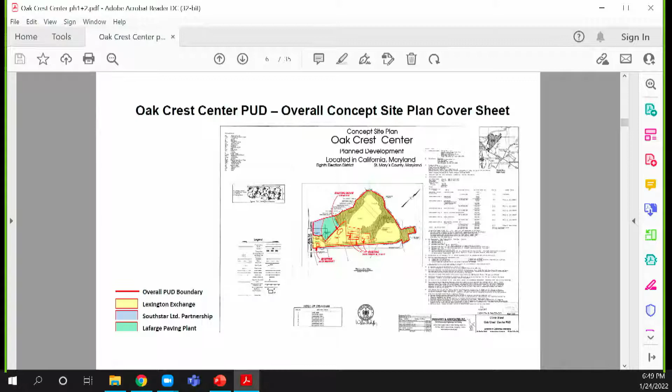This plan is a page from the overall concept plan for the PUD for Oak Crest Center. The yellow area is the actual Oak Crest or Lexington Exchange site. The shaded blue area is the Southstar property. The green shading is the Lafarge plant. Next slide, please.

Okay, this is a slide showing our overall development in the colors. The yellow portion are the 3 buildings that are either constructed or are almost constructed. The R/C movie theater is shown, the Lafarge paving plant and Southstar. And then on the other side of 235 is the Wildwood Center. And then to the south is the Aldi. Next page, please.

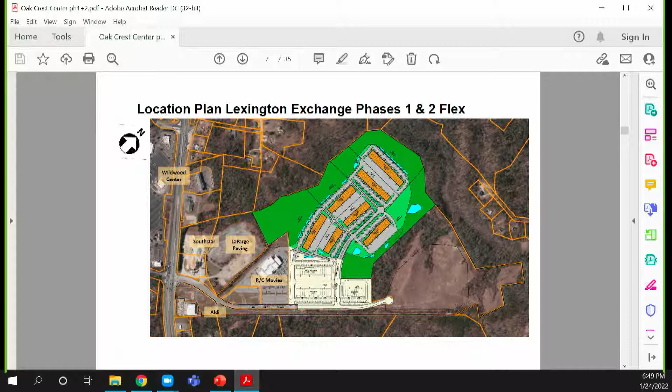This slide shows the area bounded in yellow that's going to be disturbed for this section of plans. It shows the lot lines for the 7 lots that are in there, and also shows in yellow buildings A, B, and C that have been mentioned previously. Next slide.

Okay. This is the good plan that actually shows the development that we're in for tonight. The 7 buildings shaded in brown, and the paving area shaded in gray. This is basically an extension of the same 3 buildings that have been built already into the site. It's the same building type. It has loading areas in between, and the car parking areas out in front.

Let's see. There's sidewalks out in front of all the buildings that'll be extended out to the existing sidewalks from the buildings that are built, that are connected to the sidewalks at Oakcrest Road that lead out to 3 Notch Road.

This site, I'm going to cover a couple extra things on this site plan because it's so easy to see everything, and some of the detailed engineering plans maybe we'll go through a little quicker and stop if there's questions on it. The detailed plans are broken up in a couple different sheets because it's such a big site, but it's just easier to see everything, I think, on this page right here.

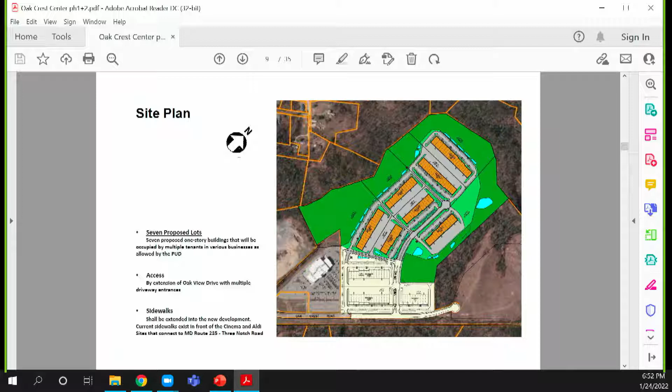And if you look at the site, there's 3 pairs of 2 buildings each with the truck loading in between it and the car parking out front. If there's any questions about the layout, this will be a good slide to ask the questions about. Do you have any questions? Okay. Next slide, please.

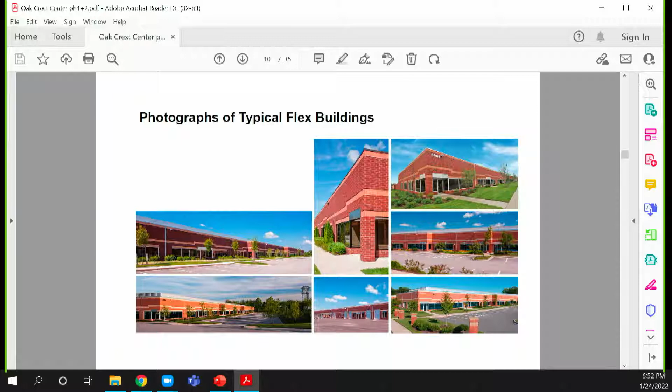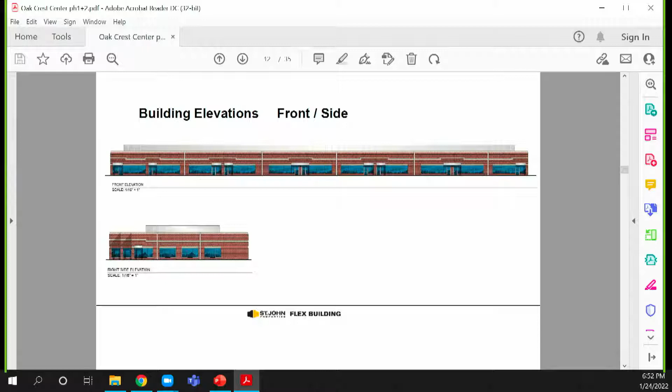Next slide, please. These are the architectural elevations of the same buildings showing the front and side views. And next one, please. Same architectural elevations, but showing the back side of the building and the side. And if you look at it, you can see there's some parts of the back of the building that are set up for truck dock height access, and other parts where you can drive straight into it, just kind of leading to the flexibility that's built into these buildings.

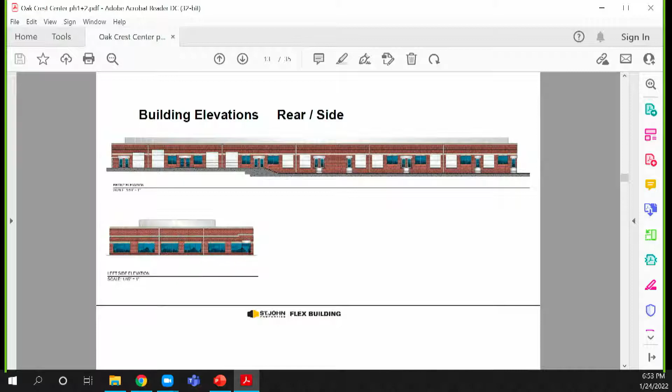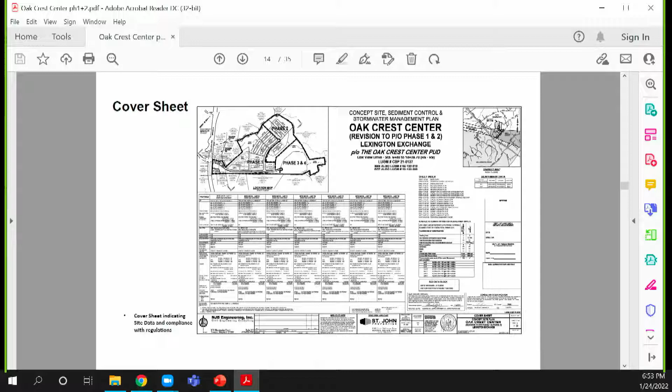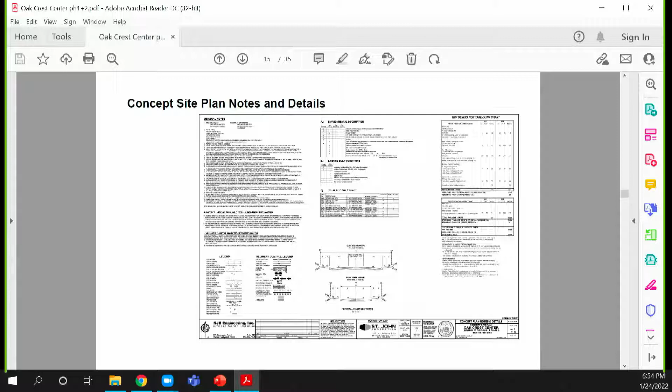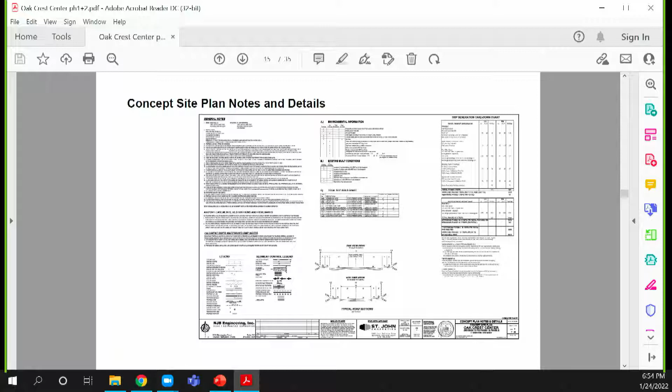Next sheet, please. This is the note plan with notes and details on it. The main point of interest on this sheet is the trip generation takedown chart, which is used to indicate where we are with respect to the required road improvements per the adequate facilities agreement. If you go through the numbers, the first 4 buildings can be built with the Phase 1 improvements already constructed, and the other 3 buildings would have to wait for the Phase 2 road improvements to be constructed. There's a slide at the end that shows the summary of those road improvements, and if there's any questions, it might be good to get that slide up at the end.

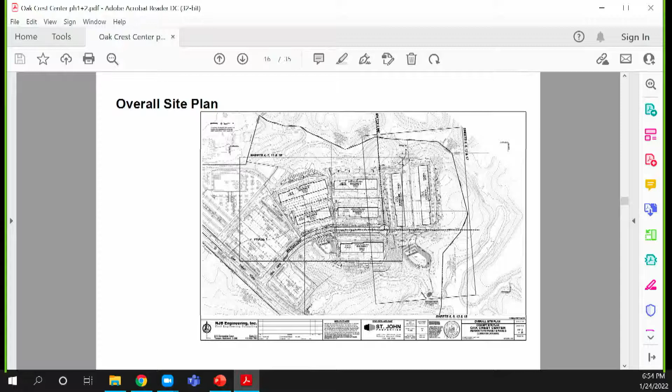The rectangles around it just show that there's different sheets that cover the different areas, just because of the size of it. We're probably going to zip through a lot of this since most of it is on that colored site plan sheet. So let's go through the slides quickly, and if there's any questions, we'll pause to stop at that. That's existing conditions, 1 part of 3.

Continue, please. More existing conditions, just showing the land as it exists today. Another part of the site, same thing.

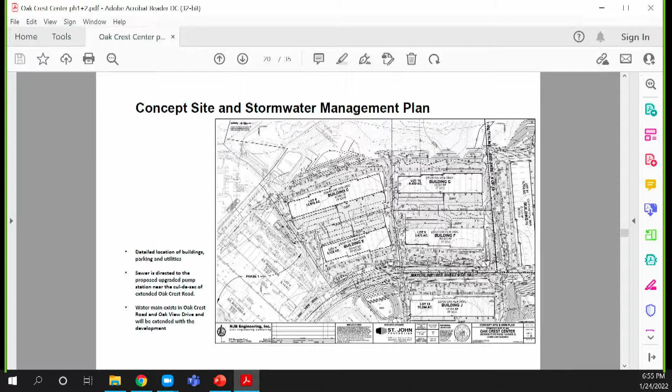The concept site stormwater management plan, just a detailed engineered version of the colored drawing showing the grading and utilities. Another part of the site.

And that's just the 1 building that's by itself without a shared truck loading, just because of the dimensions of the site. Next, please.

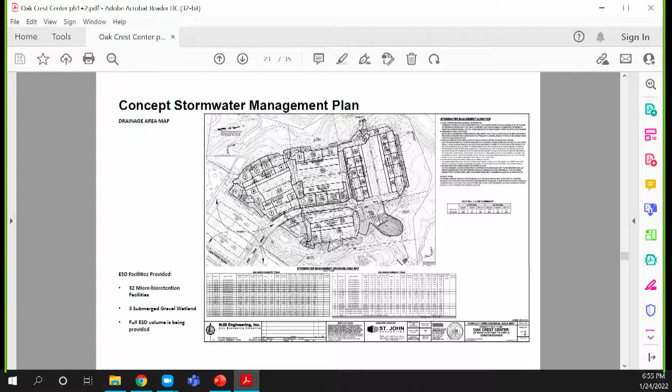That's the stormwater management drainage area map that shows the 30-some micro-bioretentions and the 3 gravel wetlands that were colored in blue on the colored sheet. Next, please.

That's the concept sediment control plan, the first sheet of it, showing perimeter controls to filter the sediment during grading operations. We'll of course need a detailed sediment control plan approved by the Soil Conservation District when we prepare our final plans.

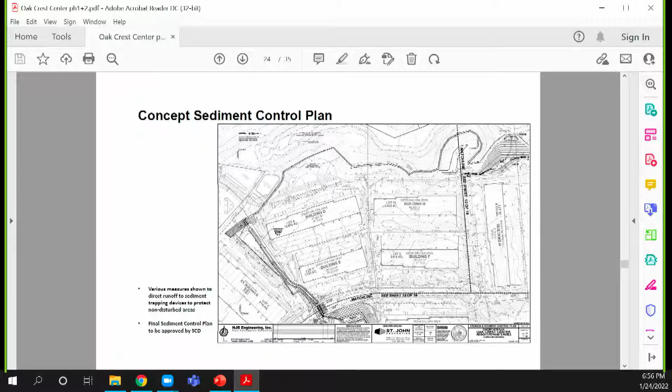A continuation of that as well in the next sheet. Continuation as well.

This is a plan showing cross-sections that, per the regulations and the checklist, we have to take through the site to show the buildings in relation to the topography.

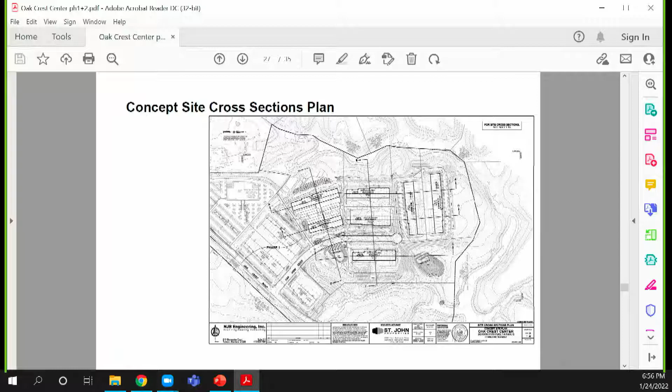The next sheet shows the actual sections themselves, which show how we had to grade the site and level it out a bit to accommodate the buildings. The buildings are 1-story buildings, so they're not big, huge rectangles there.

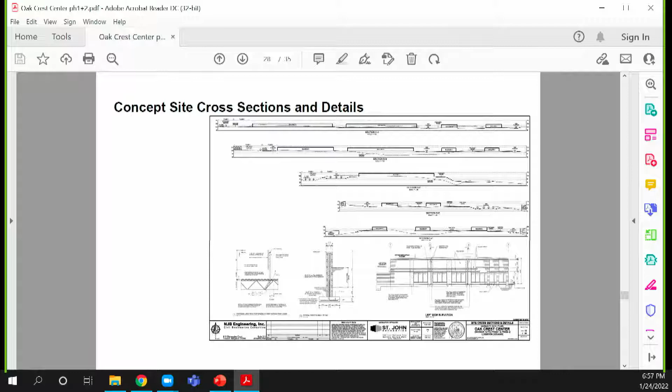Next page, please. The concept landscaping plan, there's 3 sheets of this as well. All the landscaping that's required is provided, and the next 4 sheets show the actual plantings and identify the numbers of planting materials. Next, please.

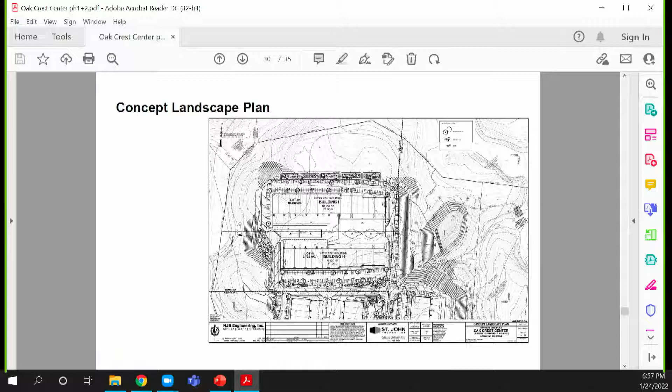And that's the one that shows all the counting, the numbers of plants. Next, please.

This sheet shows, in highlighted dark lines, the sidewalks that are constructed with these 7 buildings that connect into the first 3 that are built, or mostly built.

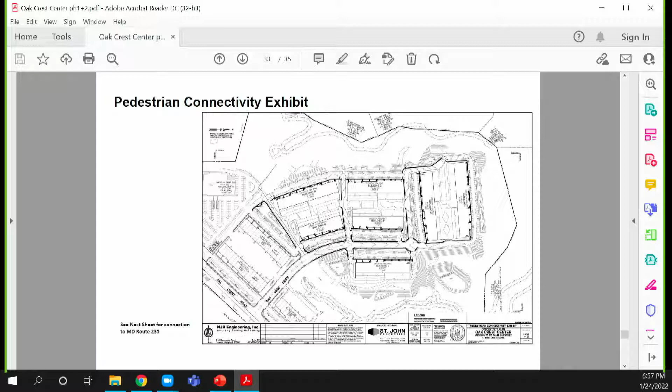The next slide shows in various color codes the sidewalks. The first red at the top right of the sheet shows the sidewalks built with the first 3 buildings. The yellow shows the sidewalk constructed in front of the Cinema and along Oakcrest Road that goes out to Oakcrest Road. Some of the other red shows the future sidewalks that'll be constructed as Lafarge and the South Star sites get developed. Then there's a blue section that shows the connection across 235 to the existing sidewalks at Wildwood.

Next slide, please. While you're there on that sheet, back up quick, please. Who's responsible for that sidewalk that goes from Wildwood across the street to you all?

Another team member is working on that part, and I will defer to either Ken or Greg as to the status of that. What do you think?

Could you come up to a microphone? Give us your name, please. Ken Finley with St. John Properties.

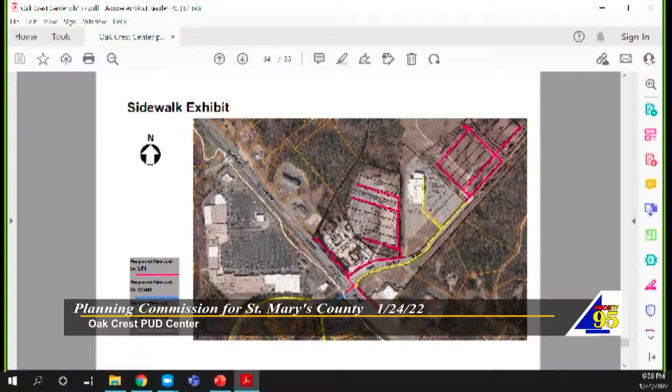That sidewalk's a county DPW capital improvement project, and I believe Soltesz and Greg are also working on that. Ken, you're speaking about only the blue section shown on the slide, correct? Only the blue. We are building the pedestrian signal and crosswalk across the highway, so St. John Properties is going to be constructing that. That plan's approved; we're probably going to do it this spring. The areas going across Oak Crest Road and then across 3 Notch, those are going to be striped as pedestrian crossings, with the signals.

Zebra striping? Okay, thank you. And then the blue one's being done by the county. They had to acquire property.

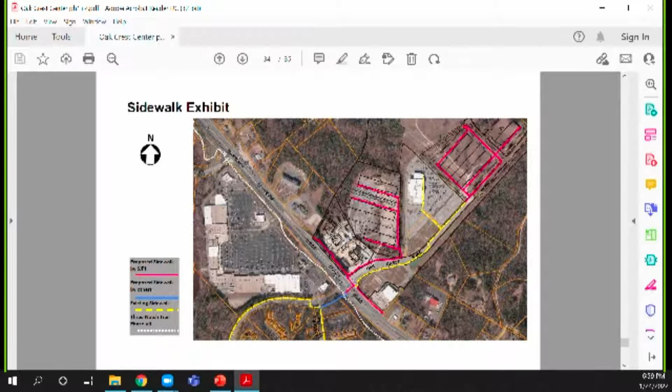One more question. It's hard to see on the yellow where it comes out of the movie theater, and then it looks like it comes down and crosses Oak Crest and continues just north of the Aldi on the southern side of Oak Crest. When the other 2 properties in front of the Lafarge and the other one are completed, is the sidewalk going to be a short distance to be connected to keep it on that side?

Yeah, sidewalk ultimately will be on both sides of Oak Crest Drive. But because we haven't done the development yet for the South Star, the Lafarge, or those 2 vacant pads right in front, the sidewalk just hasn't been put in. But it will be, will be, when they're finished out there. Yes, correct. Thank you. Yep.

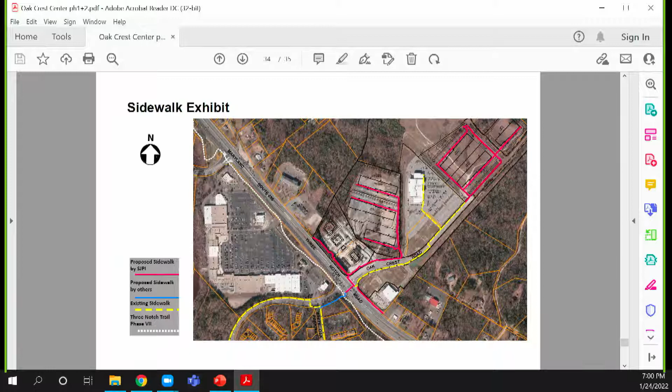Anything more on this sheet? Okay, next one, please.

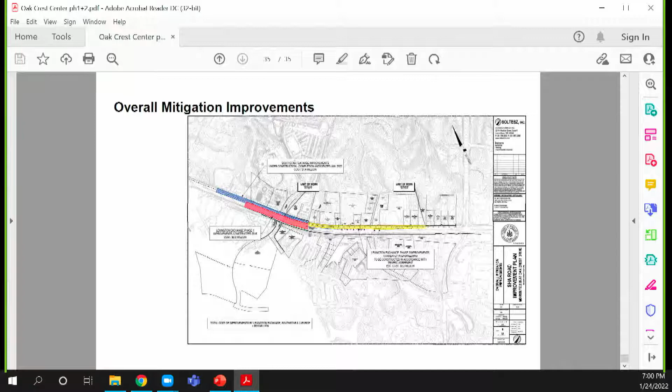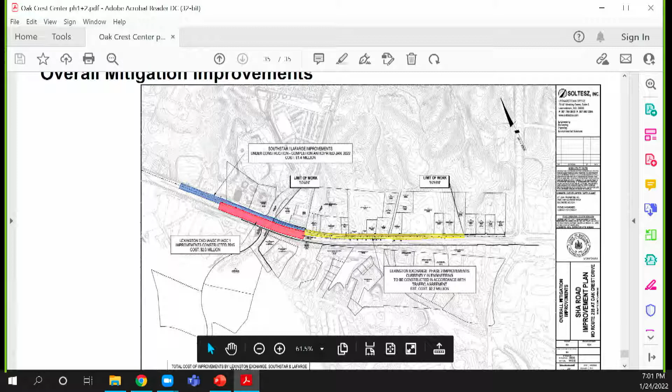This is the sheet that shows the overall road improvement phases, basically. There was an adequate traffic agreement that I mentioned earlier that covered different improvements for different levels and different numbers of trips. The red shaded area were the Phase 1 improvements that were constructed in 2016.

The blue shaded area were the South Star and Lafarge improvements that are just about complete now. I think they're waiting on increased temperature so they can finish the striping. The yellow shaded area are the Phase 2 improvements that are currently in engineering, and they would need to be constructed prior to the last 3 buildings that are part of this concept site plan. And I believe that is all, so if there's any questions.

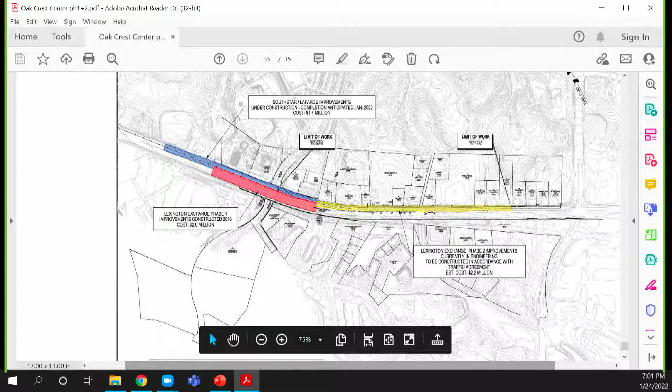Anybody have any questions? Which is what you just showed, the last section, the yellow? Are they going to wait until they build the last 3 buildings, or are there plans underway for them now? What's the status of that?

The plans have been prepared or are being reviewed from State Highway, so they're in process and diligently being pursued for approval. So it's not necessarily that you're going to start 4 buildings and then wait till they're done and then start constructing so you can build the last 3. It'll just be done whenever - I'm not saying tomorrow, but the plan is, when it's ready, it'll be done. The first 4 buildings will be constructed as the road currently exists. I'm not sure what the actual construction timeline is for the yellow improvements, other than that the plans are being prepared and will be approved hopefully shortly.

Okay, and who's constructing that? Is that State Highway? No, that'd be the obligation of the developer to construct before the last 3 buildings could be occupied or built, or whatever the requirement is, I think.

Are you the guys that get to talk to all the property owners along there and say we're paving in? I'm actually not working on the plans, if there's any specific questions about that engineering. I was just curious - I wouldn't want to be that person. A lot of the work can actually happen inside the existing right-of-way, so hopefully there won't be that much impact to the individual owners.

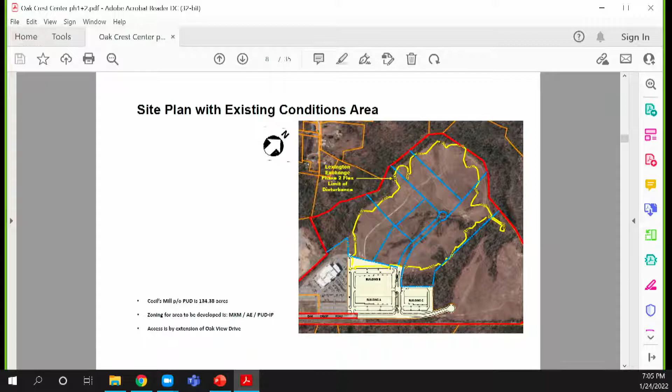That little yellow area that sticks beyond the property lines - that's a storm drain outfall that has to be built per the original stormwater concept. You've got to snake around the site to get to a level point. It's Public Works and Soil Conservation out in the field looking at the most logical place to put it. That would tie in with phase 3 and 4 later. The phase 2 and 3 improvements are kind of tied to the phasing of the traffic improvements, so they go across the lot lines a little bit - that's how we're tracking it.

Thank you. Any other questions?

If there are no other questions, I'll close this part down and open it up to public testimony. If there's anybody in the audience, which I don't think there is this evening, that was going to speak - do we have anybody on sign-in sheets? You want to check and see if we have any calls in with Kimberly?

Hi, Ms. Wood, do we have anybody on hold that wishes to speak? No, we do not. Okay, thank you. You're welcome.

Hearing none, I'll go ahead and close public testimony. Chris, was there anything? No, we appreciate your consideration tonight. As you heard from Mr. Rout at the beginning, it's been very successful. This building type is being well received by the business community. We think these will hopefully have the same success, and it will be a successful continuation of what's being built out there.

We're glad to see the project moving at the pace that it is, and we appreciate your time tonight. We'll defer to the staff report on their addressing of the 5 standards. I'm certainly here if you have any questions. I'll note for the record, and just ask that the staff report be made part of the record, and all of the agencies have signed off on it. So unless you have questions, we appreciate your time tonight.